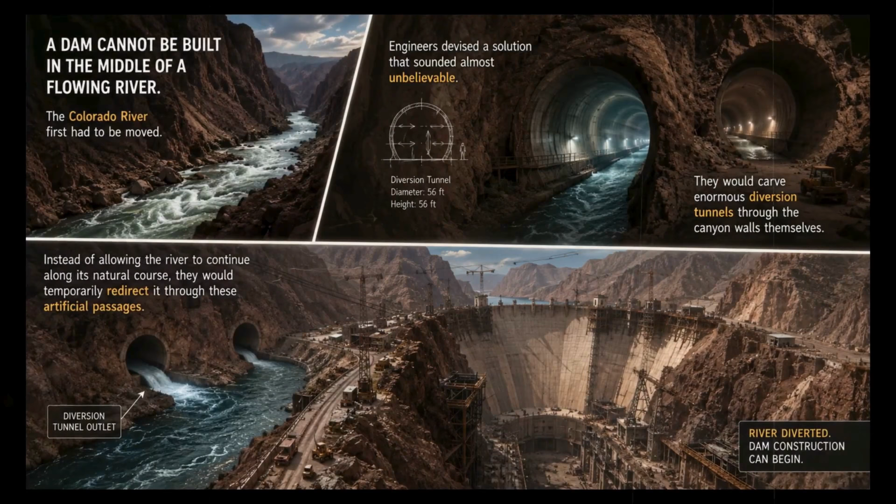Engineers devised a solution that sounded almost unbelievable. They would carve enormous diversion tunnels through the canyon walls themselves. Instead of allowing the river to continue along its natural course, they would temporarily redirect it through these artificial passages.

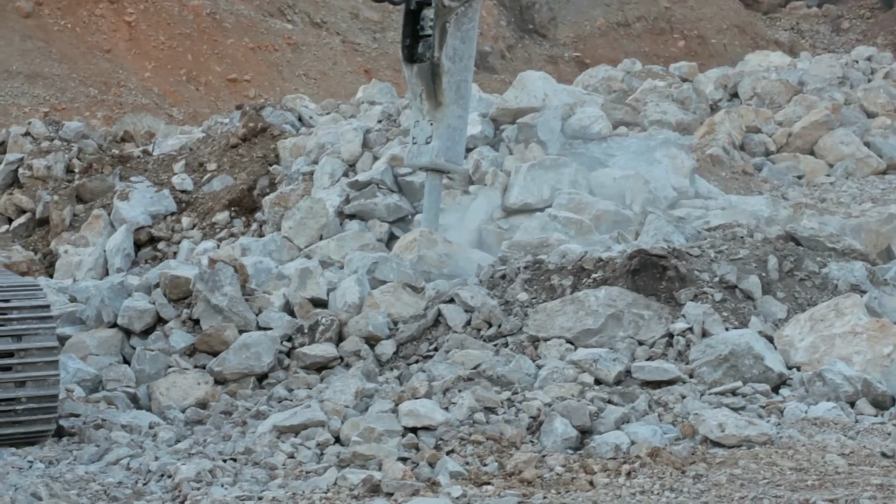The scale of the undertaking was staggering. Four massive tunnels were planned, two on the Nevada side of the canyon and two on the Arizona side. Each tunnel would measure approximately 56 feet in diameter, or about 17 meters, large enough to accommodate a substantial building.

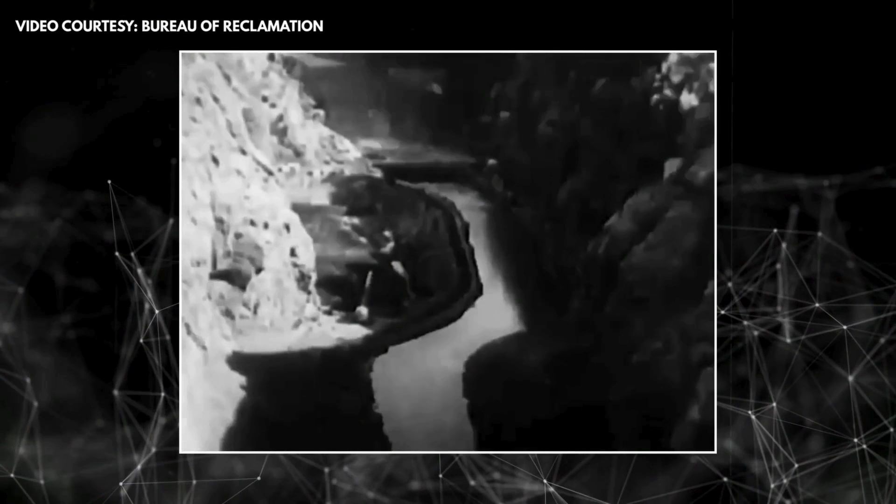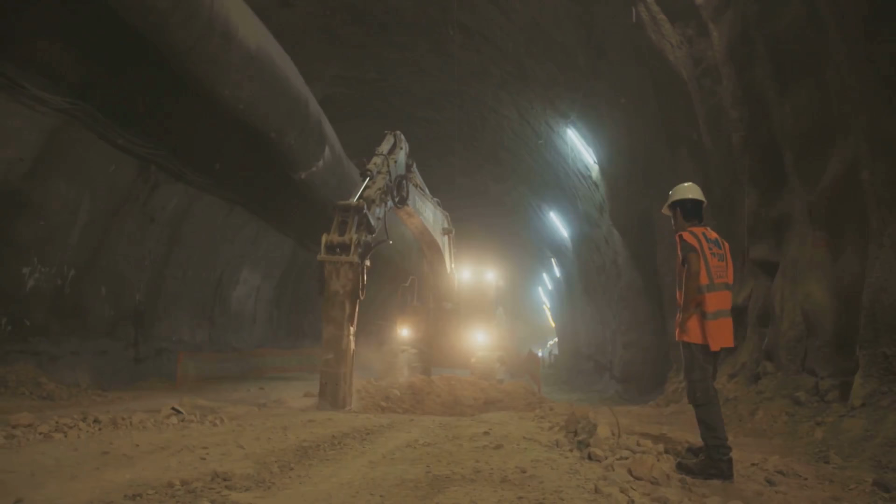The hazards were constant. Falling rock threatened workers from above. Machinery accidents occurred without warning. Heat exhaustion remained a daily concern. Despite these dangers, progress continued.

Thousands of men arrived seeking employment during the depths of the Great Depression. Across the United States, economic hardship had left millions unemployed. Families struggled to survive. For many, a job at the dam represented an opportunity that could not be ignored, regardless of the risks.

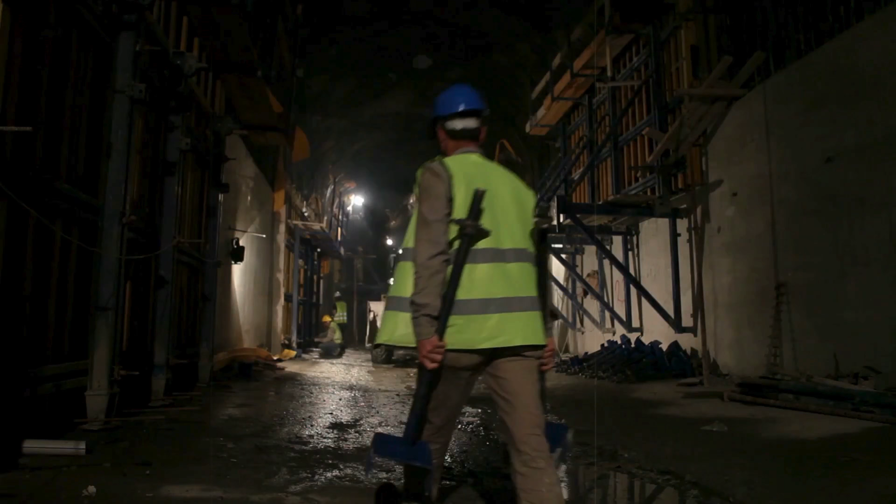Workers travelled from distant states carrying hopes of steady wages and a better future. What they encountered was a construction project unlike anything most had ever seen.

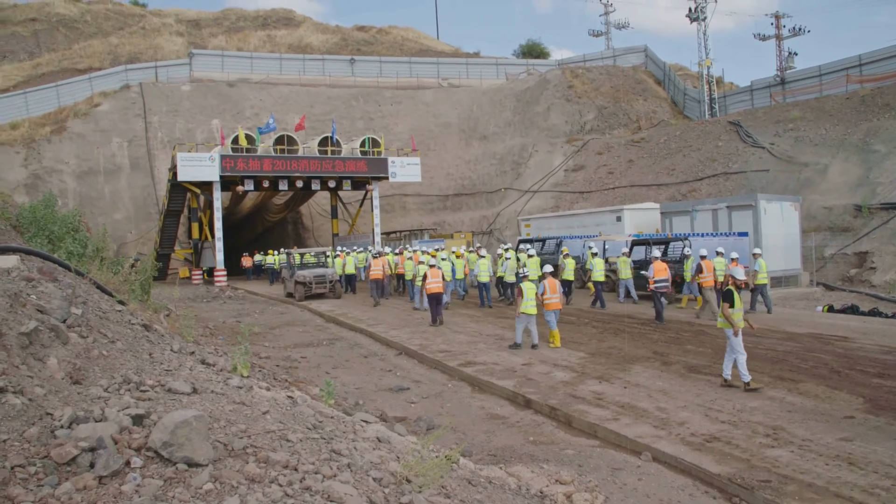Temporary camps emerged near the canyon. Roads were built. Supply chains were established. Equipment arrived in vast quantities. Engineers, surveyors, geologists and labourers worked together in an environment where every task seemed larger than life.

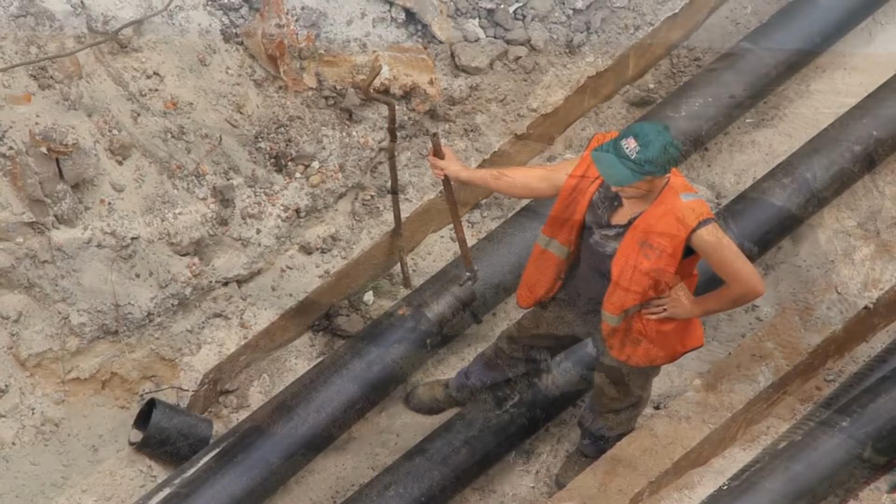As excavation advanced, another challenge became apparent. The canyon walls themselves required preparation. Loose rock had to be removed before concrete placement could begin.

High scalers, as they became known, descended on ropes from towering cliffs, dangling hundreds of feet, or dozens of meters, above the river below. Armed with jackhammers and small explosive charges, they chipped away unstable rock that might otherwise threaten the structure. The work demanded extraordinary courage.

One misplaced step could prove fatal. One failed rope could mean disaster. Yet these workers became legendary figures of the project, suspended between earth and sky as they prepared the canyon for one of history's most ambitious construction efforts.

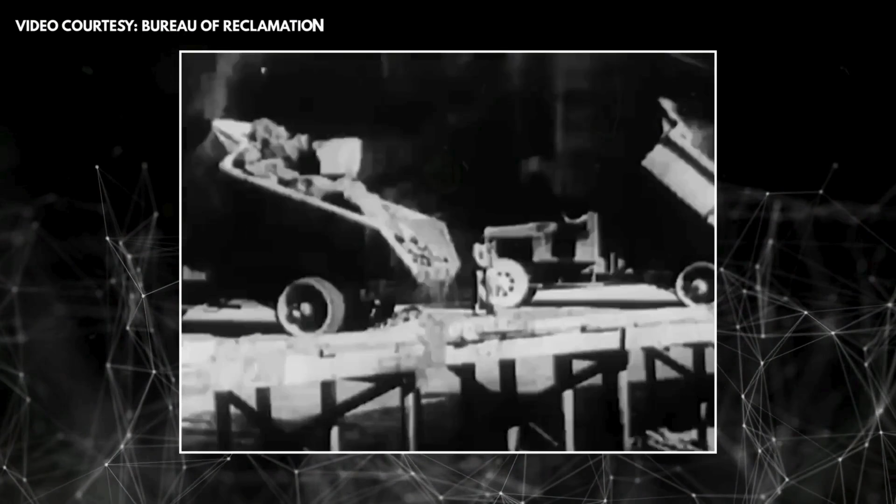By the time the diversion tunnels were completed, attention shifted toward redirecting the river itself. Massive cofferdams were constructed upstream and downstream of the future dam site. These temporary barriers guided the Colorado River into the newly excavated tunnels.

Gradually, water abandoned its ancient channel and flowed through pathways created by human hands. For the first time in countless centuries, a section of the riverbed stood exposed. Construction could begin. The dam itself would require unimaginable quantities of concrete.

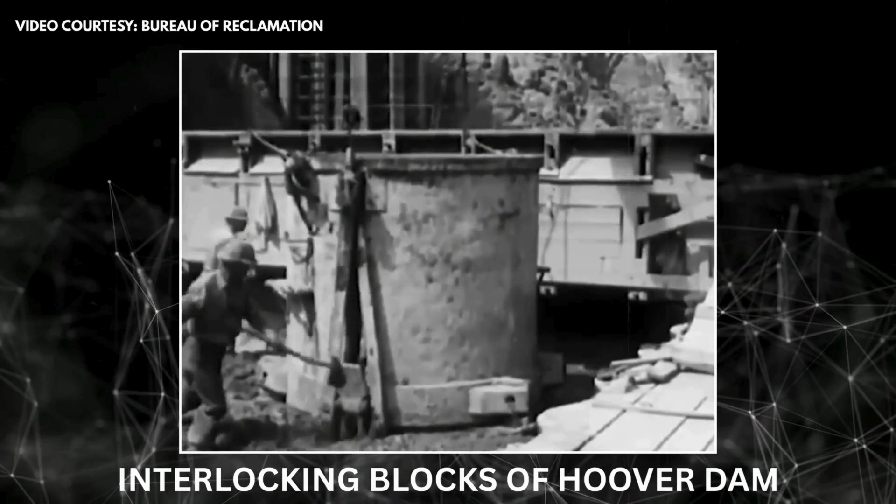If all the concrete had been poured as a single continuous mass, engineers feared the material might retain heat for decades while curing. Internal temperatures could remain elevated for more than a century, creating stresses capable of weakening the structure. To solve this problem, the dam was built in interlocking blocks. Each block was poured separately. Embedded cooling pipes circulated cold water through the concrete, accelerating heat removal and allowing the material to cure more efficiently. This innovation became one of many engineering breakthroughs associated with the project.

Every aspect demanded creative solutions. Every challenge required new thinking. Every milestone expanded the boundaries of what engineers believed possible.

As the structure rose higher, its immense scale became increasingly apparent. The dam eventually reached a height of approximately 726 feet, or about 221 meters. At its base, the structure measured roughly 660 feet thick, or about 201 meters thick. Even near the crest, where the dam narrowed significantly, it remained massive.

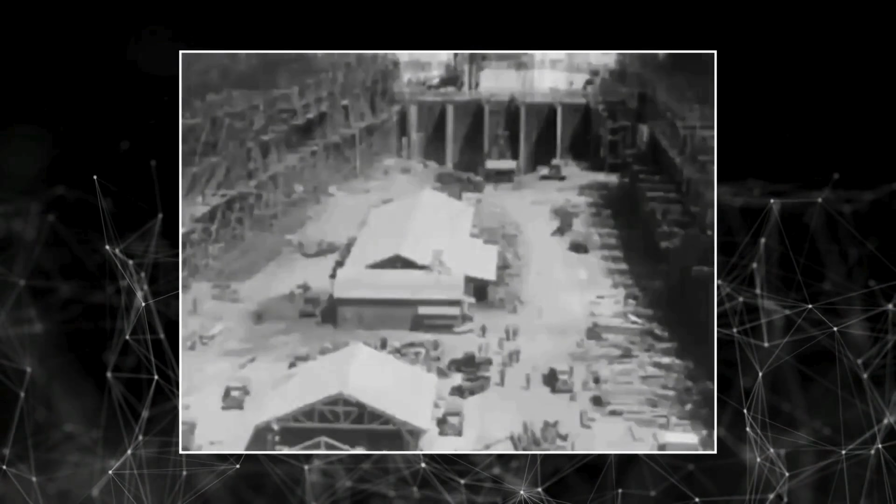Visitors standing nearby often found their sense of scale distorted. People appeared tiny against the towering wall of concrete. Vehicles resembled toys. The canyon itself seemed transformed.

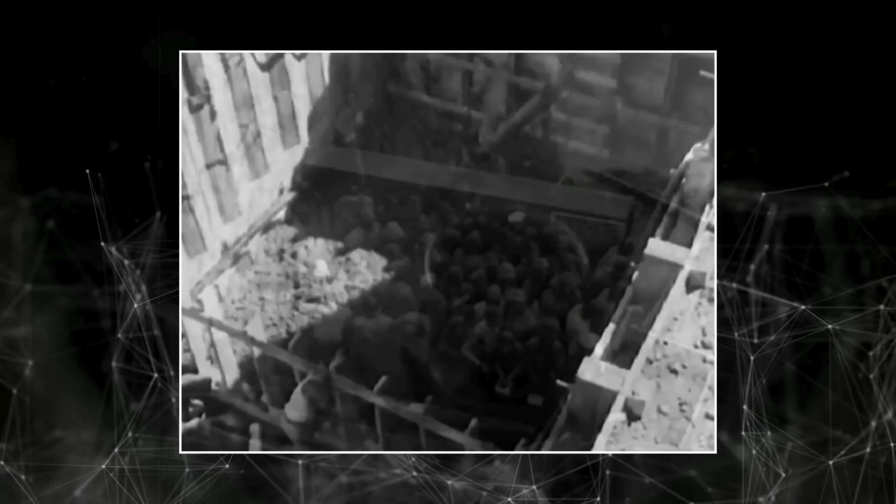Meanwhile, workers continued laboring around the clock. Concrete pours proceeded day and night. Equipment operated continuously. Crews coordinated thousands of tasks with remarkable precision.

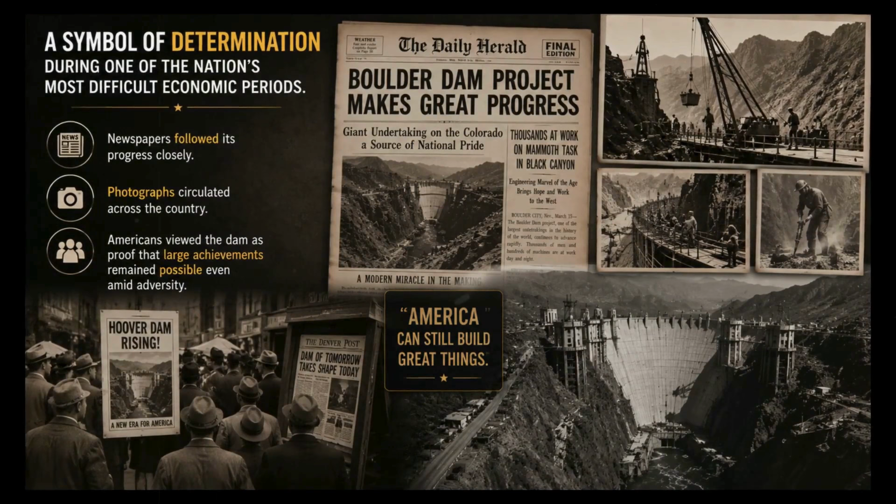The project became a symbol of determination during one of the nation's most difficult economic periods. Newspapers followed its progress closely. Photographs circulated across the country. Americans viewed the dam as proof that large achievements remained possible even amid adversity.

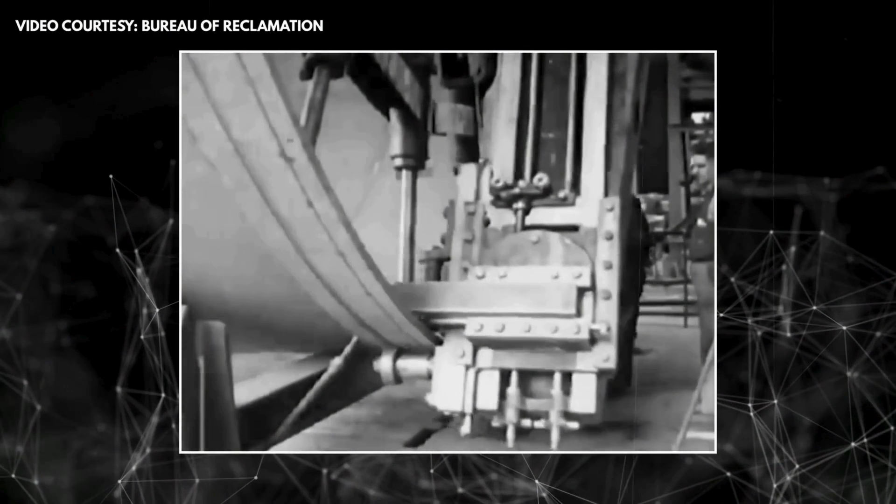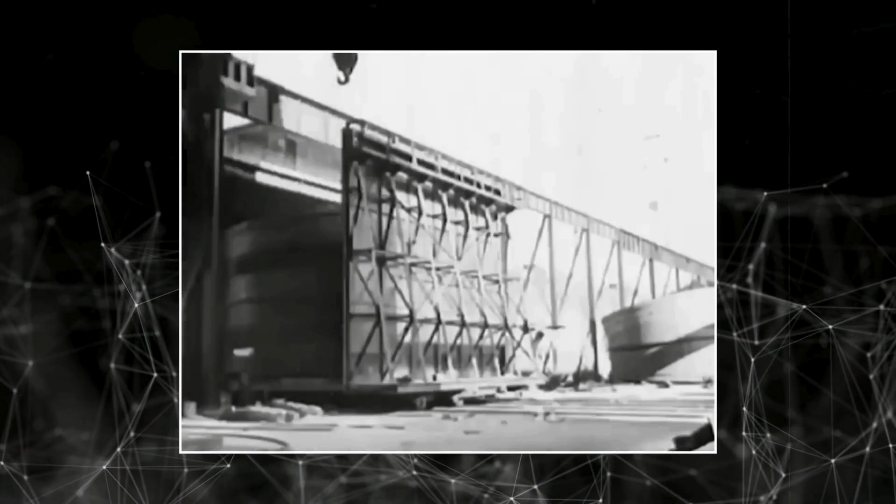Yet success carried a human cost. Construction accidents claimed lives. Heat-related illnesses affected workers. Dangerous conditions were an unavoidable reality of the era. Every milestone reflected not only engineering expertise, but also personal sacrifice. Those sacrifices became woven into the identity of the project itself.

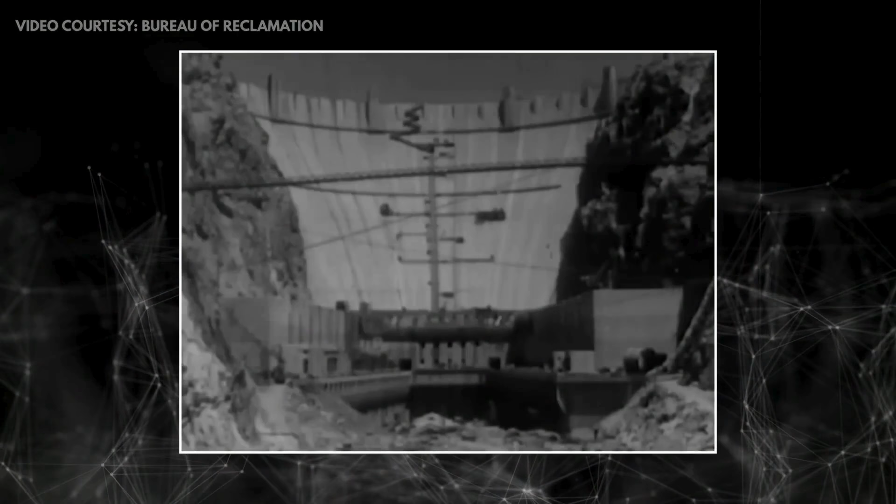When the dam neared completion, its significance extended far beyond the canyon where it stood. It represented technological innovation, economic recovery, national ambition, and confidence in the power of engineering to reshape the environment. Then, at last, the immense structure was finished.

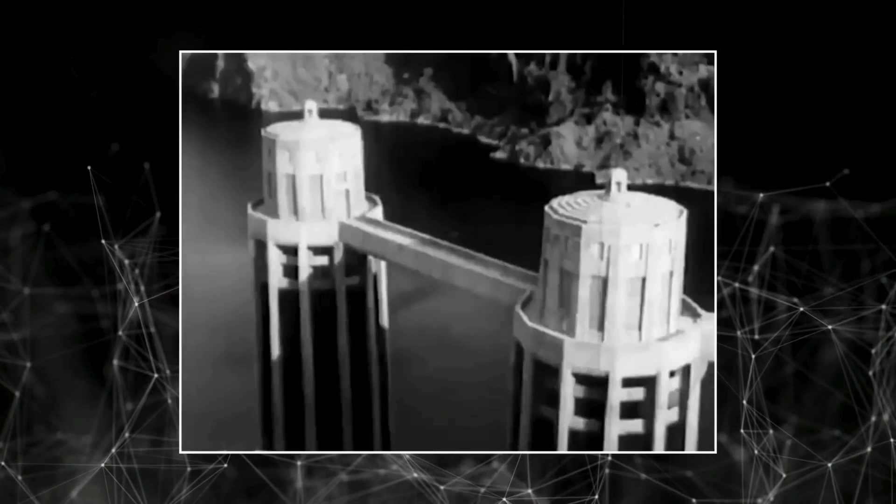The Colorado River, once free to surge through the canyon according to its own rhythms, now encountered a barrier unlike anything nature had ever placed in its path. Water began accumulating behind the newly completed dam. Day after day, the reservoir expanded. Former valleys disappeared beneath rising water. Canyons flooded. Shorelines migrated outward. The transformation unfolded gradually, yet its scale was extraordinary. An entirely new landscape was being born.

Behind the dam, a new inland sea began to form. The water rose slowly at first. Week after week, month after month, the Colorado River continued delivering snowmelt and runoff from distant mountains. Instead of racing unimpeded toward the lower basin, those waters now accumulated behind Hoover Dam. Valleys disappeared beneath the expanding reservoir. Ancient river channels vanished under deepening blue water. Cliffs that had once overlooked a winding river suddenly stood above a growing inland sea.

As the reservoir filled, it became clear that something extraordinary was taking shape in the desert. The new lake stretched across an immense landscape of drowned canyons and submerged valleys. Shorelines extended for hundreds of miles or hundreds of kilometers. Water occupied places where, only a short time earlier, dry desert terrain had dominated the horizon.

The reservoir would become known as Lake Mead, named after Elwood Mead, one of the key figures involved in Western water development. Its size was difficult to comprehend. At full capacity, Lake Mead could store roughly 28 million acre-feet of water, or approximately 34½ cubic kilometers of water, enough to rank among the largest reservoirs in the world. The volume represented years of Colorado River flow held in reserve behind Hoover Dam, creating a level of security that earlier generations could scarcely have imagined.

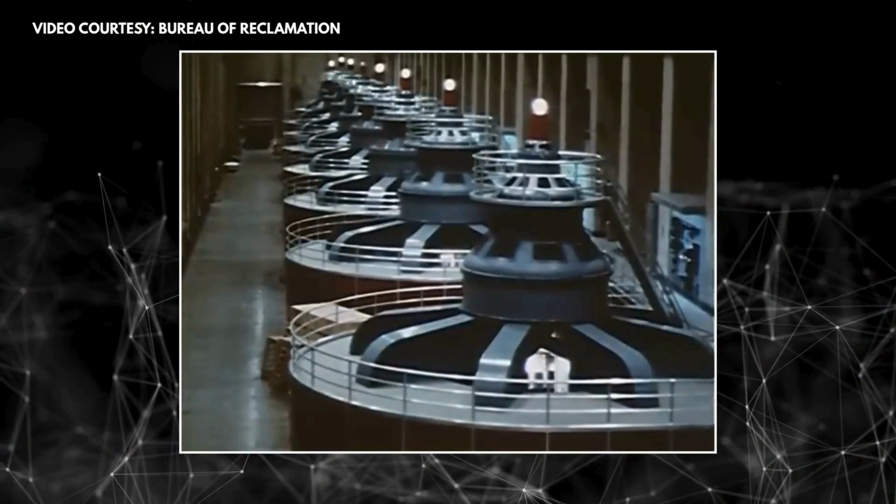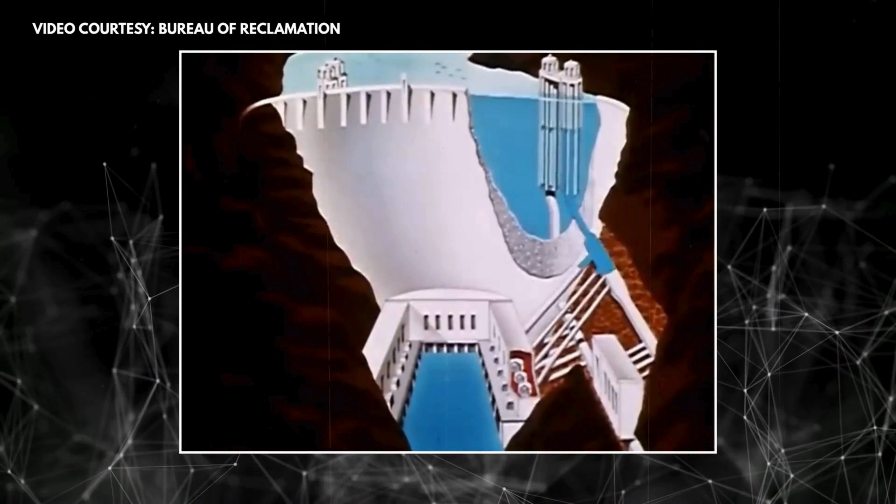The benefits extended beyond agriculture and municipal supplies. Inside Hoover Dam, another powerful engine of development had begun operating: hydroelectric generation. As water passed through turbines deep within the dam, the energy of falling water was converted into electricity. The process produced large quantities of reliable power without requiring the combustion of fuel.

Transmission lines carried that electricity across vast distances. Communities received power. Industries expanded. Economic growth accelerated. The dam became more than a water management structure. It became part of the foundation upon which the modern Southwest was built.

Generation after generation grew accustomed to its presence. Residents opened faucets expecting water to arrive. Businesses planned around dependable electricity. Farmers counted on irrigation deliveries. Tourists visited a reservoir that appeared permanent. Over time, dependence evolved into familiarity. Familiarity evolved into assumption. Many people never witnessed the Colorado River before Hoover Dam existed.

They never experienced the dramatic seasonal fluctuations that had once defined life along the river. For them, Lake Mead was simply part of the landscape, a vast body of water in the desert, a normal feature of the American Southwest, an enduring symbol of engineering success. The reservoir became a destination as well as a utility. Boaters explored flooded canyons, anglers sought fish in deep waters, families gathered along shorelines, marinas expanded to accommodate recreation on a scale few could have imagined when construction first began.

The changes became visible. At first, only careful observers noticed. Boat ramps required adjustments. Marinas relocated sections of their facilities. Shorelines migrated farther from locations where water had once reached.

Then the evidence became unmistakable. A broad white band emerged along the surrounding cliffs and mountains. Known informally as the bathtub ring, this striking feature marked previous water levels. Minerals left behind by retreating waters created a pale stripe visible from miles away. As the reservoir dropped, the ring grew wider and more prominent.

Visitors arriving at Lake Mead often found themselves staring at this enormous scar across the landscape. It provided a visual measurement of change. The difference between past and present stood literally written upon the canyon walls. Photographs comparing different years became increasingly dramatic. Areas once submerged lay exposed. Old structures emerged from the receding shoreline. Previously inaccessible terrain returned to daylight after decades beneath the water. The reservoir remained enormous by most standards, but its transformation was impossible to ignore.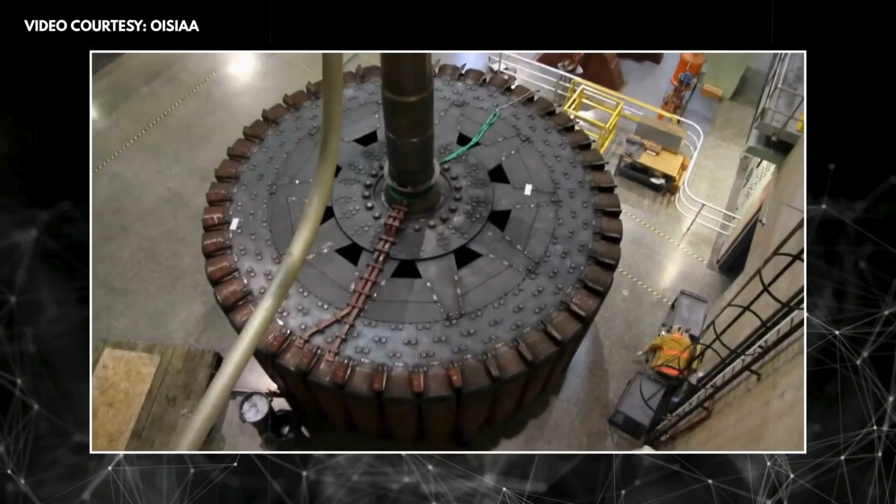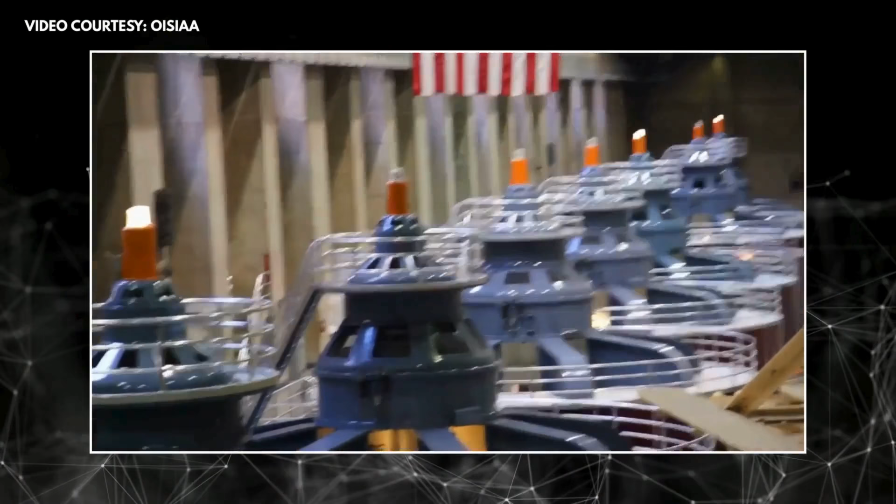Deep inside Hoover Dam, hidden behind one of the most recognizable structures in the United States, a carefully orchestrated mechanical world has been operating for generations. Visitors standing atop the dam often focus on the immense reservoir stretching toward the horizon or the towering concrete wall rising from Black Canyon. Yet some of the most important components of the entire system remain largely unseen. Far below the surface, enormous turbines and generators transform the movement of water into electricity. For decades, these machines have quietly helped power communities across the Southwest. Their operation appears almost effortless.

Water enters the dam. Electricity emerges. Lights turn on hundreds of miles away or hundreds of kilometers away. Air conditioners cool homes during desert summers. Businesses operate. Cities function. The process seems simple. The reality is a masterpiece of engineering built upon one of the most fundamental principles in physics: gravity.

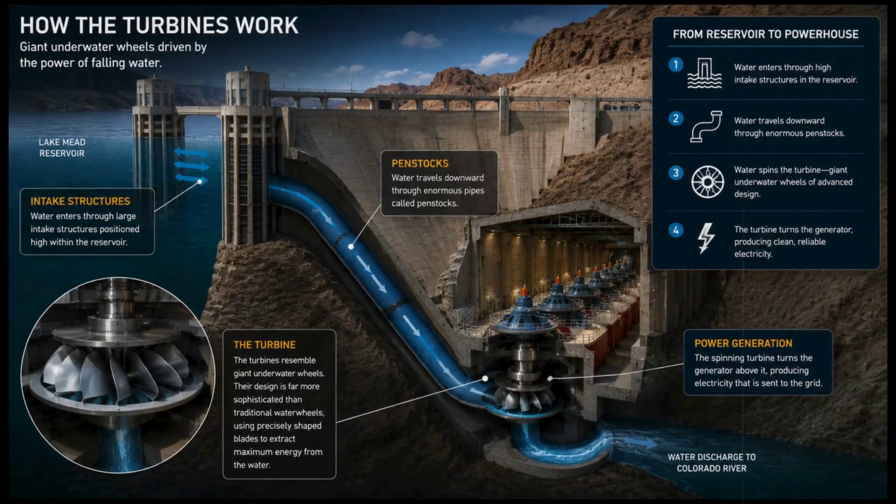Hoover Dam's power generation system includes 17 commercial generators along with 2 station service generators used to support dam operations. Together, these 19 machines represent the heart of the facility's hydroelectric capability. Each commercial generator is connected to a massive turbine. The turbines resemble giant underwater wheels, although their design is far more sophisticated than traditional water wheels. Water enters through large intake structures positioned high within the reservoir and travels downward through enormous pipes known as penstocks.

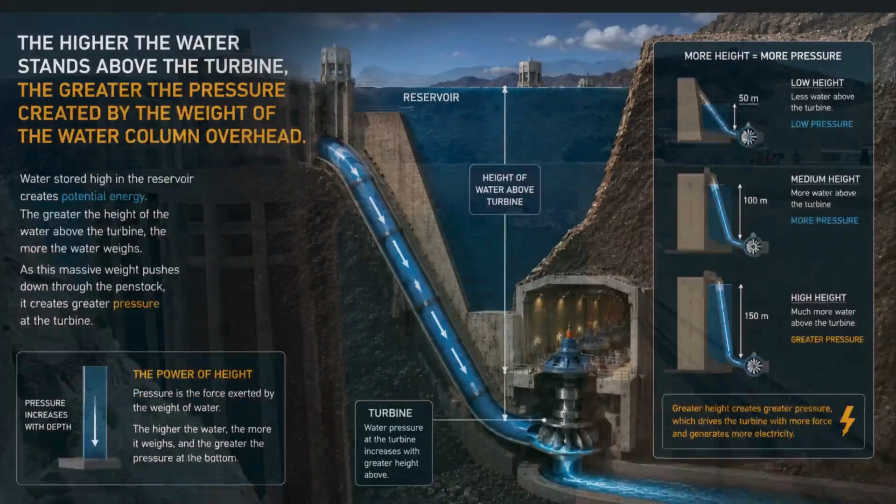As the water descends, something important happens. Gravity accelerates it. The higher the water stands above the turbine, the greater the pressure created by the weight of the water column overhead. When the moving water strikes turbine blades, it causes the turbine shaft to rotate. That rotating shaft turns the generator. The generator converts mechanical motion into electrical energy. The concept is elegant. Water falls. The turbine spins. Electricity is produced. For nearly a century, this system has converted the stored energy of Lake Mead into a dependable source of power.

Yet a crucial detail is often overlooked: water alone does not create electricity. Height creates pressure, and pressure creates power. This distinction lies at the center of the growing concern surrounding Lake Mead.

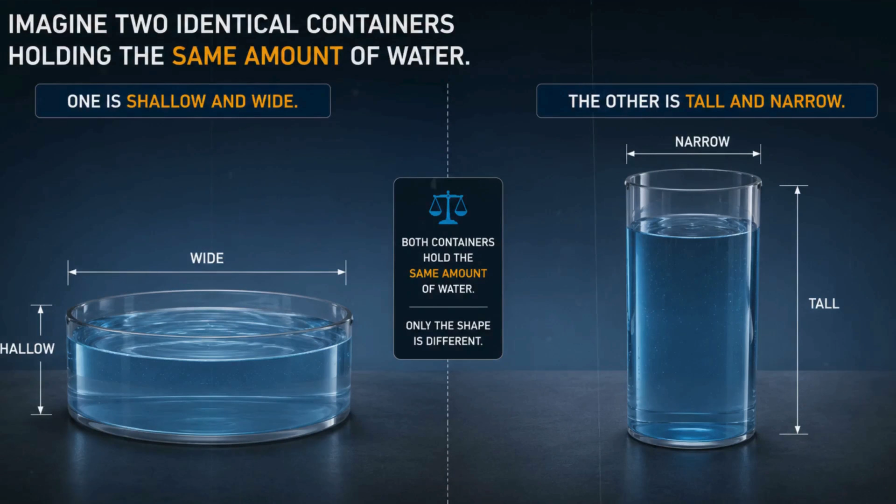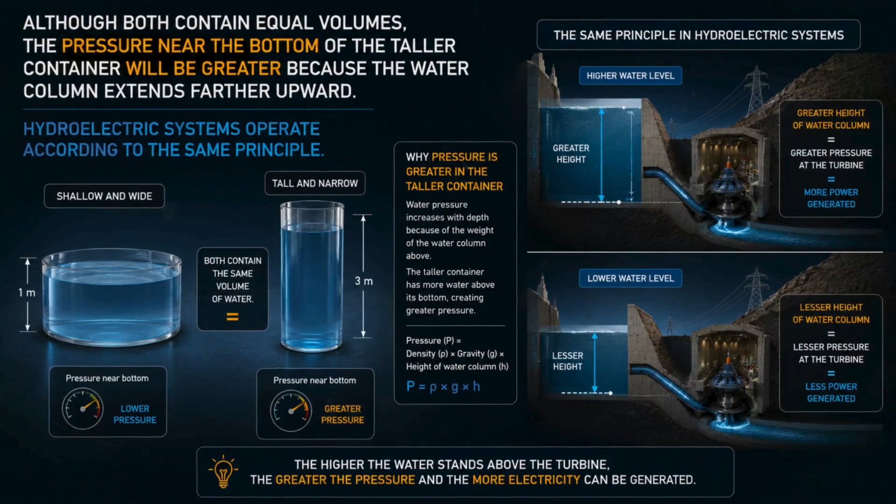Imagine two identical containers holding the same amount of water. One is shallow and wide, the other is tall and narrow. Although both contain equal volumes, the pressure near the bottom of the taller container will be greater because the water column extends farther upward. Hydroelectric systems operate according to the same principle.

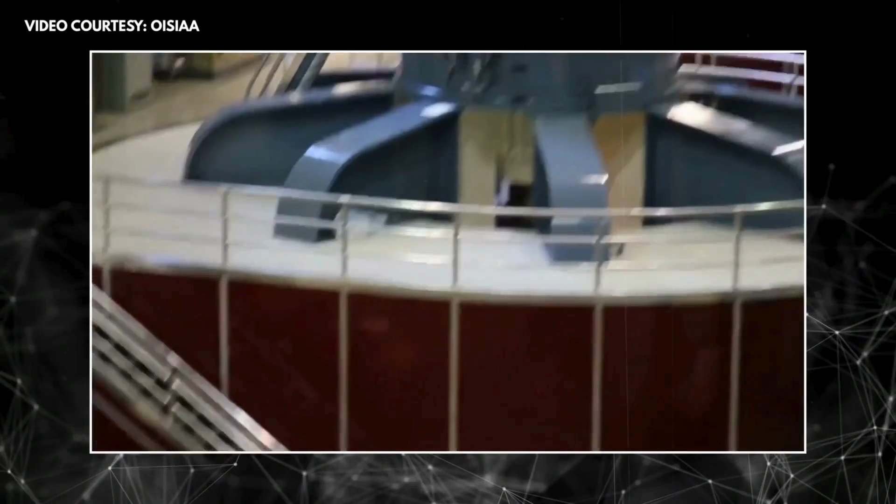Engineers refer to this vertical distance as hydraulic head. It is one of the most important measurements in hydroelectric generation, representing the difference in elevation between the water surface and the turbine below. The larger the hydraulic head, the greater the available pressure. The greater the pressure, the more efficiently turbines can generate electricity.

Lake Mead functions as an enormous elevated reservoir supplying hydraulic head to Hoover Dam. Every foot, or approximately 30 centimeters, of elevation contributes to the pressure available inside the system. Every foot lost reduces that pressure.

At high reservoir levels, water enters the intake structures with tremendous potential energy. Turbines receive strong flows capable of producing substantial electrical output.

At lower reservoir levels, conditions begin to change. The water still exists, and the reservoir still contains enormous quantities of stored water, but the vertical distance between the surface and the turbines becomes smaller. As hydraulic head declines, generating efficiency declines as well. The turbines can still operate, but they do so under increasingly challenging conditions.

This is why engineers pay such close attention to reservoir elevation rather than focusing solely on total storage volume. From a distance, a reservoir may appear large. Its surface may still stretch across miles or kilometers of desert. Millions of acre-feet of water, or billions of cubic meters, may remain stored behind the dam. Yet hydroelectric performance depends heavily on where that water is positioned vertically.

A gallon of water, or approximately 3.8 litres, near the top of the reservoir possesses more energy potential than a gallon of water located much lower. Elevation matters. The physics is unavoidable. No amount of engineering can repeal gravity. No operating procedure can eliminate the relationship between height and pressure.

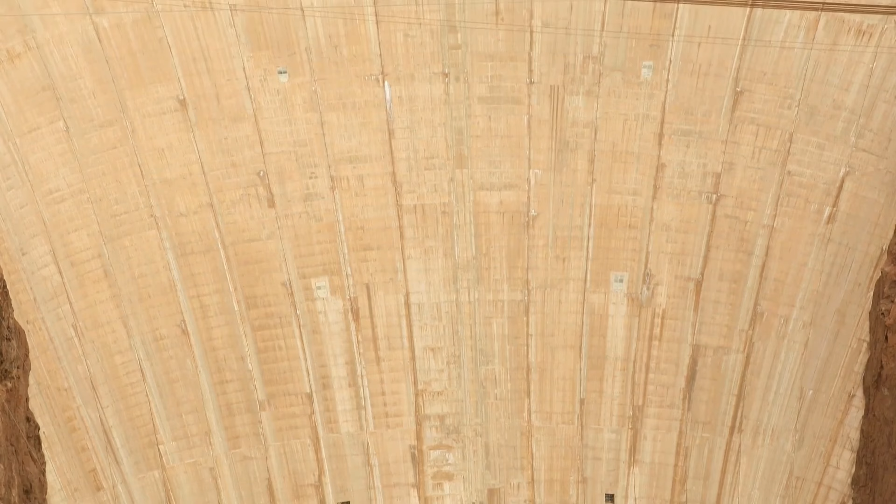The entire hydroelectric system depends upon maintaining sufficient hydraulic head. This reality becomes especially important when examining Hoover Dam's role within the regional power grid. The facility does not provide electricity for every community in the southwest.

Modern energy systems are far more diverse than they were during the dam's early decades. Natural gas facilities, solar installations, wind farms, geothermal resources, and other generating sources now contribute substantial amounts of power. Nevertheless, Hoover Dam remains an important component of the regional energy network. Its electricity supports millions of people, its generation can respond rapidly to changing demand, and its output helps stabilize portions of the grid.

For decades, the reservoir's elevation remained high enough that hydraulic head rarely attracted widespread public attention. The system simply worked: water entered the turbines, generators produced electricity, communities received power. Few people had reason to think about the precise elevation of Lake Mead.

Today, that elevation has become one of the most closely watched numbers in Western water management, because every foot, or approximately 30 centimetres, matters. Every decline affects hydraulic head. Every reduction influences generating capability. And while Hoover Dam's turbines are remarkably resilient, they cannot operate without sufficient pressure. The relationship is governed not by politics, economics, or public opinion. It is governed by physics.

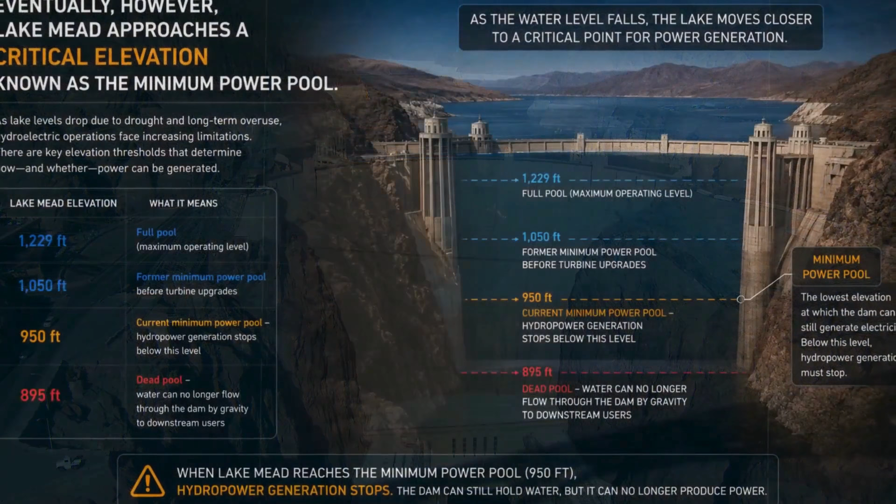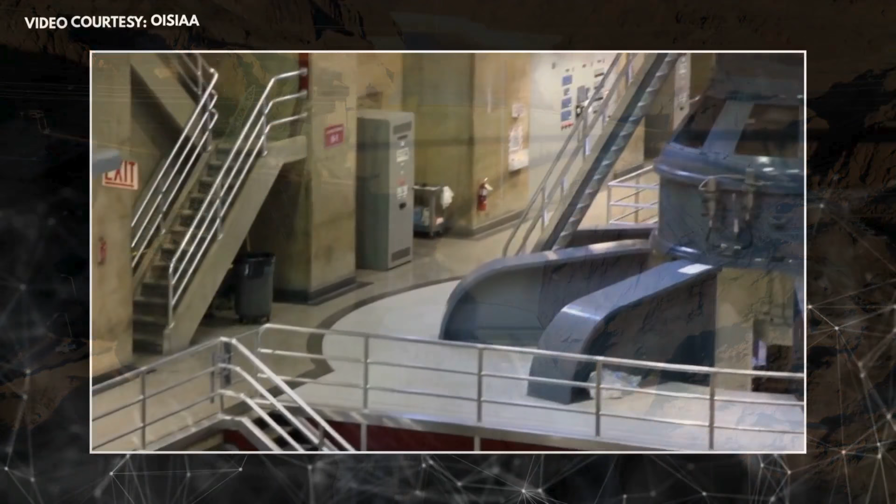Eventually, however, Lake Mead approaches a critical elevation known as the minimum power pool. This is not the point where the reservoir is empty. Far from it. Millions of acre-feet of water, or billions of cubic meters, can still remain behind Hoover Dam. From the shoreline, the lake can still appear enormous, but the water is no longer high enough. Without sufficient elevation above the turbines, gravity cannot produce enough hydraulic pressure for conventional hydroelectric generation.

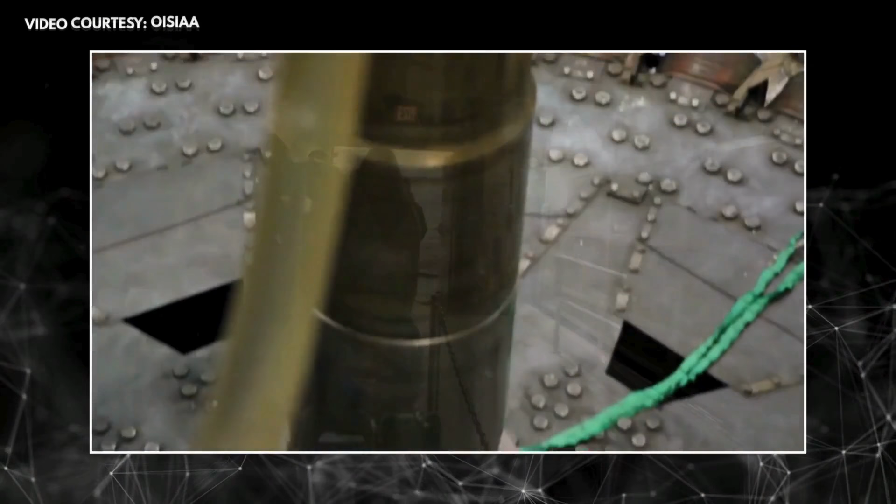The generators themselves remain fully functional. The powerhouse remains intact. Nothing has broken. Instead, the laws of physics become the limiting factor. The turbines require pressure. Pressure requires elevation. Without enough hydraulic head, electricity can no longer be generated as Hoover Dam was designed to operate.

That is why engineers focus on elevation rather than simply the amount of water remaining inside Lake Mead. The reservoir may still look full to many visitors. Yet, from an engineering perspective, the only measurement that truly matters is how high that water stands above the turbines. Which brings us to an even more important question: how much elevation remains before all 12 generators approach the limits of what physics will allow?

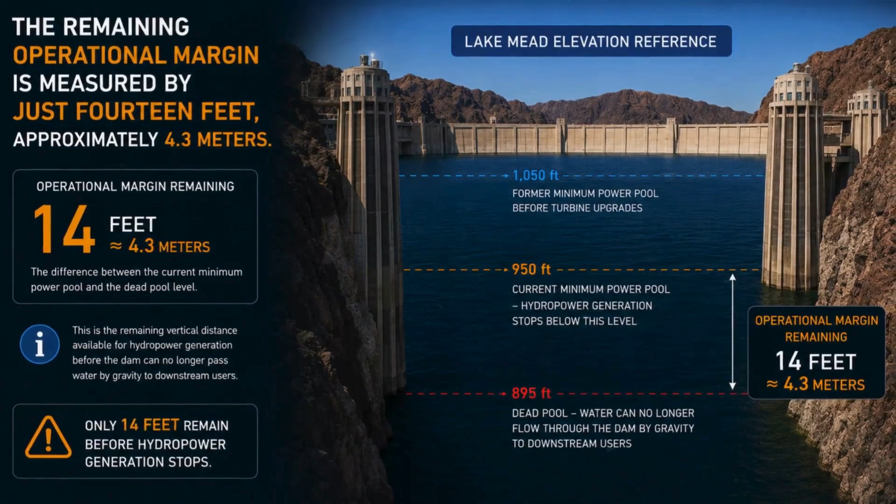The answer is astonishing. The remaining operational margin is measured by just 14 feet, approximately 4.3 meters. 14 feet. That is shorter than many living rooms. It is roughly the height of a single-story building. Compared with a reservoir stretching more than 100 miles, or over 160 kilometers, it seems almost insignificant.

Yet those final 14 feet separate continued hydroelectric generation from a threshold engineers have worked for years to avoid crossing. Within that narrow band lies the hydraulic head needed to keep all 12 generators operating. Within that narrow band lies valuable time for heavy snowfall in the Rocky Mountains to replenish the Colorado River. Within that narrow band lies the opportunity for conservation measures, interstate water agreements, and favorable spring runoff to stabilize reservoir levels. Every additional foot of water buys more flexibility. Every foot lost reduces the pressure available to drive the turbines.

This explains why Lake Mead has become one of the most closely monitored reservoirs in the world. Engineers track mountain snowpack throughout the winter. They measure runoff forecasts during the spring. They monitor evaporation during the scorching desert summers. They coordinate water releases from upstream reservoirs while balancing the demands of millions of people who depend on the Colorado River every single day. All of those efforts ultimately influence one measurement: elevation.

Not because Hoover Dam is in danger of collapsing. It is not. The dam remains one of the strongest and most carefully maintained engineering structures ever built. Its concrete continues to perform exceptionally well after nearly a century of service. The concern is entirely different. It is operational. Can Lake Mead remain high enough for gravity to continue doing the work that powers 12 giant generators? That distinction is critical.

If the reservoir were ever to fall below the minimum power pool, the southwest would not suddenly go dark. Modern electrical grids receive power from natural gas plants, solar farms, wind facilities, geothermal resources, and other generating stations connected through an extensive transmission network. Electricity would continue flowing. But one of America's most iconic sources of renewable energy would fall silent.

Utilities would need to replace Hoover Dam's electricity with power from other sources, often at a higher cost. Grid operators would lose one of the region's most flexible generating facilities, capable of rapidly adjusting output to match changing demand. The consequences would be significant, even if they were not immediate.

That is why engineers continue watching every inch of Lake Mead's elevation. Because the greatest challenge facing Hoover Dam today is not structural failure. It is maintaining enough height above the turbines to keep gravity working in humanity's favour.

In the end, the future of Hoover Dam is not determined by how much water remains inside Lake Mead. It is determined by how high that water stands. And today, the difference between 12 generators producing clean hydroelectric power and a silent powerhouse is measured by one remarkably small number. Just 14 feet.